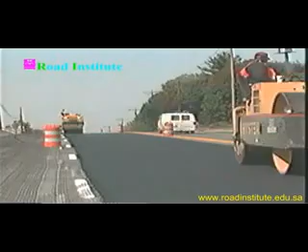For nearly a century, highway agencies and paving contractors have been constructing roads of hot mix asphalt, and with good reason. Asphalt pavements are smooth riding and long-lasting. Today, there's a new set of tools and techniques called the Superpave system that allows us to design even more durable asphalt pavements. Superpave, which stands for Superior Performing Asphalt Pavements, is the mix design system for the next century.

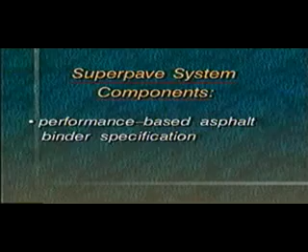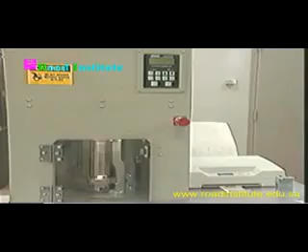The Superpave system has two key components: performance-based asphalt binder specification and volumetric mix design and analysis. It also uses an improved method of laboratory compaction that reflects field conditions. Pavements take quite a beating. Not only are they subject to ever-increasing traffic loads and volumes, but they also must serve in a wide range

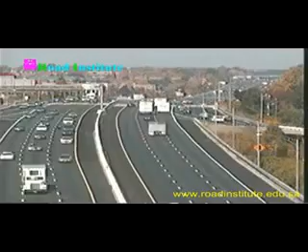of conditions. The Superpave system incorporates a new binder specification that classifies asphalt binders into performance grades based on a range of climates and pavement temperatures. The specification sets certain physical properties that all binders must meet, but the temperature at which those properties must be attained is determined by the specific climatic conditions at the paving location.

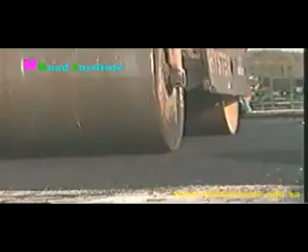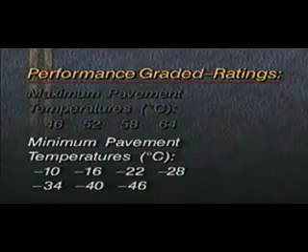Superpave binders are classified by PG, for performance-graded ratings. The rating contains two numbers indicating high and low pavement temperatures. For example, a PG 64-22 binder used in a Superpave mix is expected to be resistant to cracks and ruts at pavement temperatures as high as 64 degrees Celsius and as low as -22 degrees Celsius.

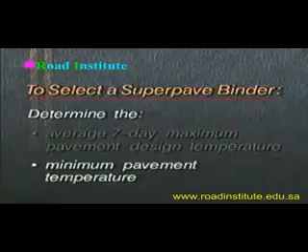To select a Superpave binder, you first determine the average 7-day maximum pavement design temperature and the minimum pavement temperature for a particular job site. To make this task easier, a weather database with more than 6,000 weather stations is included in the Superpave system.

For pavements in extreme climatic conditions, some asphalt cements may have to be modified. But modified or not, a PG binder will have the required properties to perform as expected during the pavement's life. This is what is meant by a performance-based specification.

Asphalt refiners and suppliers are converting to PG-rated binders. The conversions are being done on a regional basis, in coordination with highway agencies' shift to the Superpave binder specification. Hot mix asphalt producers should be able to buy PG binder from the same supplier they currently use.

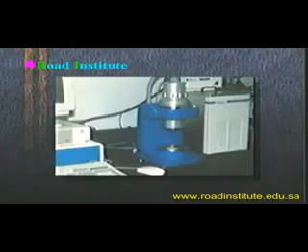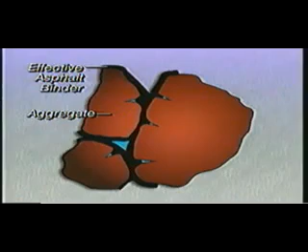Testing binders for conformance with the Superpave specification requires several new pieces of laboratory equipment. But the PG-rated binder requires no changes to standard methods of handling, storing, and transporting binders. Superpave mixes are based on volumetric properties. The characteristics of the aggregate and the volumetric properties of the mix, such as air voids and voids in the mineral aggregate, form the basis for selecting aggregate gradation and asphalt binder content.

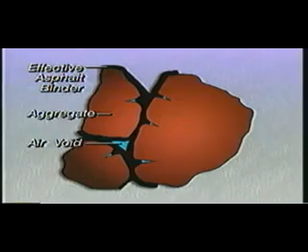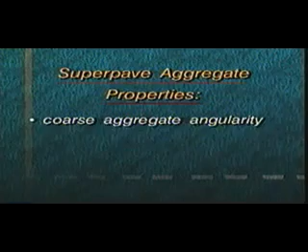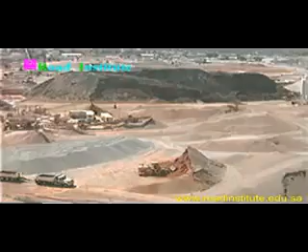The Superpave system bases aggregate selection on consensus properties that apply equally at all locations. They include coarse aggregate angularity, fine aggregate angularity, flat and elongated particles, and clay content. In addition, each highway agency determines source properties in light of local or source conditions. Source properties include toughness, soundness, and deleterious materials.

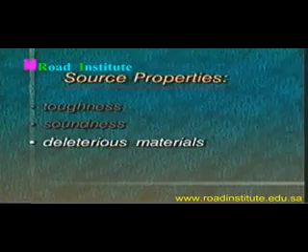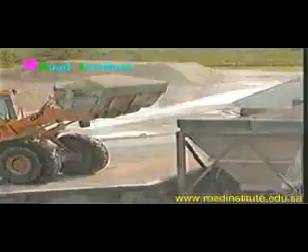These tests for measuring aggregate properties are not new. Many highway agencies are already using the tests in conventional mix design. Switching to the Superpave system will therefore require little or no additional training in aggregate selection. To improve the properties of the asphalt mix and the performance of the pavement, the Superpave system provides a means for determining the optimum aggregate structure or gradation.

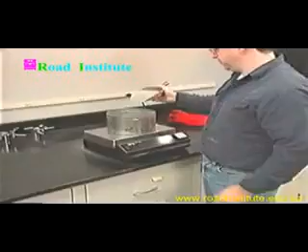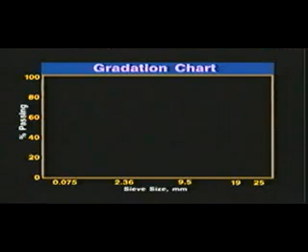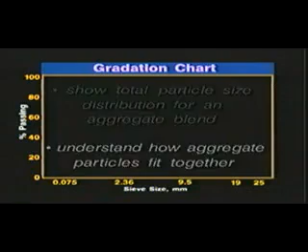The aggregate gradation process is a refinement of an approach already in use by many highway agencies. Gradations are defined using the Federal Highway Administration's 0.45 power chart. The chart can be used to show total particle size distribution for an aggregate blend. The chart is also useful for understanding how aggregate particles fit together. The maximum density line is plotted from the origin through the maximum aggregate size.

The Superpave system adds two features to the 0.45 power chart, namely control points and a restricted zone. The control points serve as boundaries for the outer ranges of key sieves. Three sets of control points are plotted, one for the nominal maximum sieve, one for an intermediate sieve, and one for the smallest sieve. Aggregate gradations must stay within the control points.

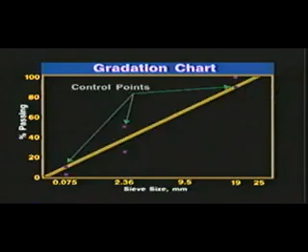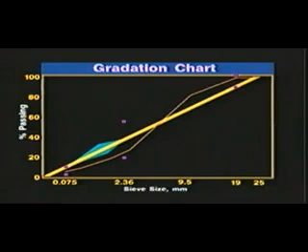The so-called restricted zone is actually a warning zone, providing a guideline for mix designers. Gradations falling in the restricted zone may have too much rounded natural sand. Mixes constructed using such gradations often experience compaction problems during construction and can be prone to rutting. For best results, mix designers should choose a gradation that falls between the control points and avoids the restricted zone.

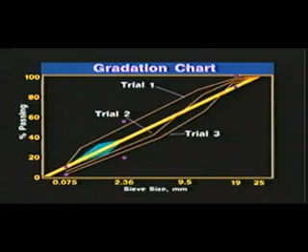The next step in designing a Superpave mix is determining the optimum aggregate structure. The aggregate sources are evaluated to develop 3 or more trial blends that meet the gradation requirements. Aggregate properties for the blends are then calculated. The appropriate PG asphalt binder is then mixed with the aggregate, and the mix is aged in an oven to simulate the aging that occurs during the construction process. The trial blends are evaluated by compacting the specimens and determining their volumetric properties.

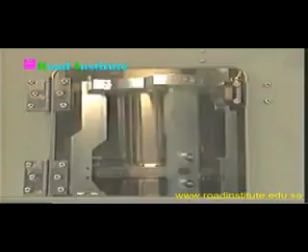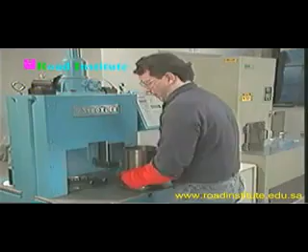The Superpave system uses a new method of laboratory compaction, the Superpave gyratory compactor. The Superpave gyratory compactor is quiet and easy to use. It more accurately reflects field compaction, and research has shown test results to be significantly more reproducible. The asphalt mixture is loaded into a mold 150 millimeters in diameter. A ram loading system maintains a constant pressure on the specimen. The mold is tilted at a slight angle and rotates while the load is being applied.

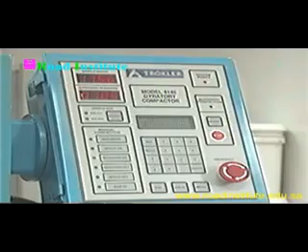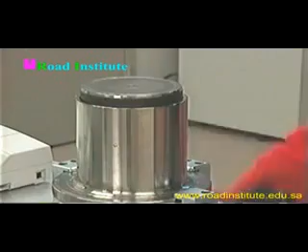The number of rotations or gyrations required for each specimen is dependent on the highest air temperature and the amount of traffic expected at the paving location. During the compaction process, the height of the specimen is continually monitored, allowing the bulk-specific gravity of the specimen to be continuously calculated. Upon completion of compaction, the specimen is removed from the mold. The volumetric properties of the mixture are calculated, and the data are analyzed to determine which aggregate blend provides the optimum aggregate structure.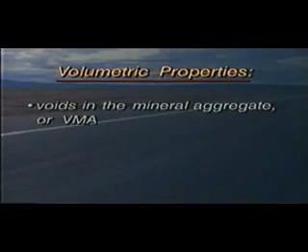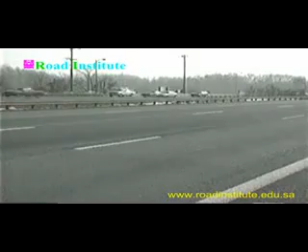Volumetric analysis is an integral part of most mix design procedures and is at the core of the Superpave system. Extensive studies have shown that volumetric properties are directly related to performance. Volumetric properties include voids in the mineral aggregate, or VMA, voids filled with asphalt, or VFA, and air voids. Controlling the volumetric properties in the field will ensure that the pavement will perform as expected.

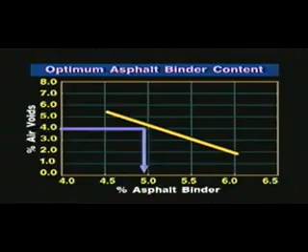The optimum asphalt binder content is then determined for the selected aggregate structure. Samples that have been prepared using different asphalt binder contents are compacted using the gyratory compactor, and volumetric properties are determined. The asphalt binder content that results in 4% air voids is then selected. The Superpave gyratory compactor can also be used for quality assurance at the construction site by determining whether the plant-produced mix meets the Superpave volumetric requirements.

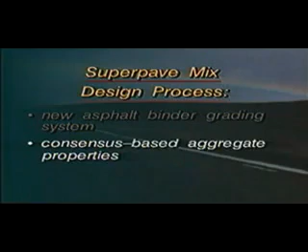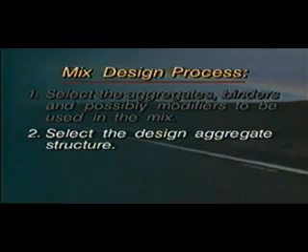As we've seen, the Superpave volumetric mix design process involves a new asphalt binder grading system, consensus-based aggregate properties, and a new method of compaction. The mix design process consists of 3 main steps. Select the aggregates, binders, and possibly modifiers to be used in the mix. Select the design aggregate structure. Select the design asphalt binder content.

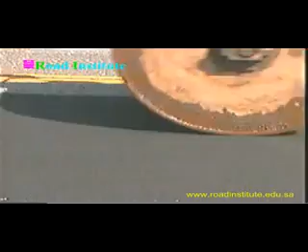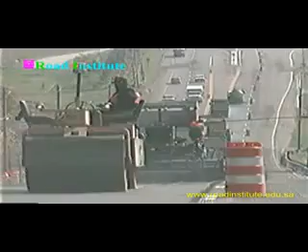Nationwide use of the Superpave binder specification is expected by 1997. The Asphalt Technical Working Group, which provides guidance and direction to the nationwide Superpave implementation program, has set a target date of 2000 for adoption of the Superpave mix design procedures. The actual schedule of implementation is, however, up to each state highway agency. Many highway agencies are already designing and specifying Superpave pavements.

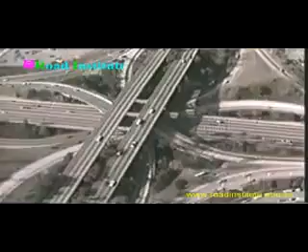The Federal Highway Administration is coordinating the transition to Superpave as part of its overall program to implement the results of the Strategic Highway Research Program. It includes training and technical assistance in Superpave binder selection and volumetric mix design procedures. Training and technical assistance are also available from a number of other organizations, including the Regional Asphalt User-Producer Groups, the Regional Superpave Centers, state and local highway agencies, National Center for Asphalt Technology, industry associations, including the National Asphalt Pavement Association and the Asphalt Institute, and universities.

Superpave is the next generation of hot mix asphalt pavement technology. It provides a new set of tools for designing smooth-riding, longer-lasting asphalt pavements. This advanced technology is ready to be put to use today. Superpave, the mix design system for the next century.